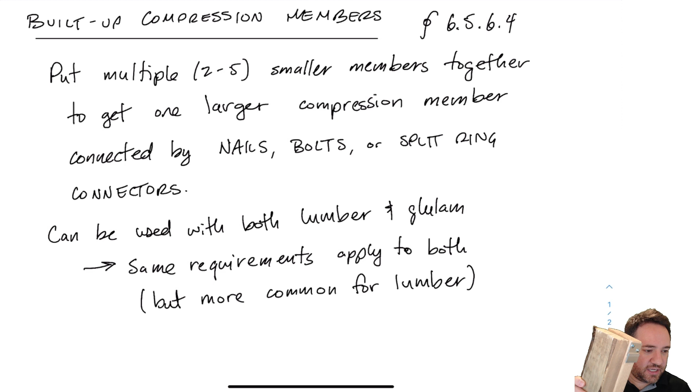So here, if I had two 2x4s, for example, and I put them together using nails, bolts, or split ring connectors, then I can consider this as being one solid column. If I do that, I'm going to get a big bonus to my buckling strength, compared to if I had to consider these as two separate columns buckling and just happening to be next to each other.

I do have to apply a reduction to the strength to account for the fact that we cannot connect these together perfectly using nails or bolts, but we still get a huge benefit to sticking them together, and we're going to see why in this video.

In the standard, it says that you can put up to 5 members together to make a built-up section. This applies to lumber and to glulam, and the same requirements apply to both. So everything in this video is for lumber and glulam, but it's much more common to see this kind of thing with lumber, because lumber members are smaller to start with, so it makes more sense to stick them together to make a bigger member.

Okay, so let's look at what one of these built-up columns might look like, and what are the requirements if I want to build one.

So here's a built-up column member. This one is very short, just so that it fits on the page. Generally, you would be talking about something longer because slenderness is probably your concern when you're doing a built-up column or built-up compression member. Here I have 3 different pieces of wood, probably lumber in this case, but could be glulam, all stuck together. So instead of 2, I have 3.

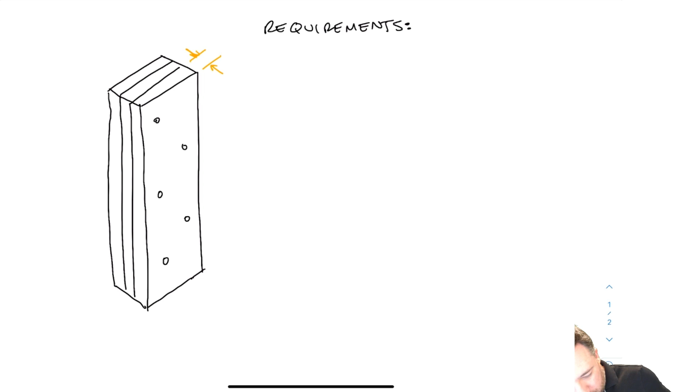As shown there, they are either nailed or bolted together, and you can see I've just indicated some nails here. This one, since it's 3, you could call that a 3-ply built-up column. But that just means that it has 3 members, and I can go up to 5.

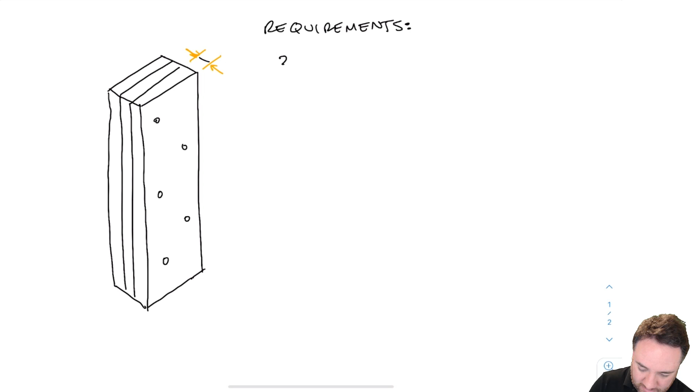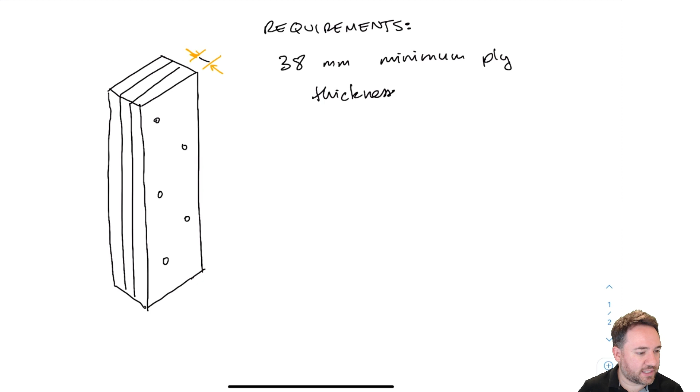So here are the requirements that we have to meet if we want to design a built-up column. First, there's a requirement on the thickness of the plies. Each individual ply of the built-up column has to be at least 38 millimeters thick. So that means a 2-by member is the minimum member that I can use. Anything bigger than that is fine - 2-by, 3-by, 4-by, all of those are fine. They do not all have to be the same thickness, but again, the minimum thickness is 38.

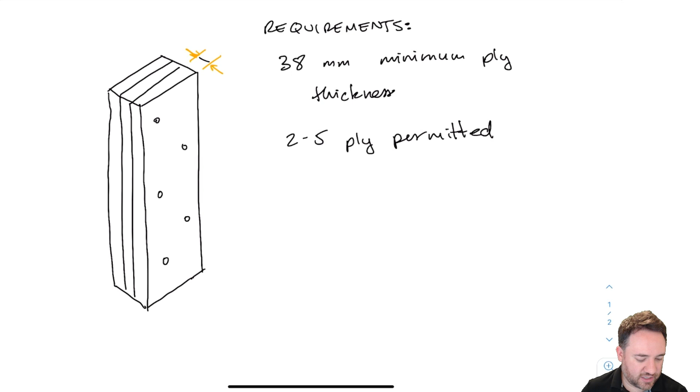We can have somewhere between 2 plies to 5 plies for a built-up column. The standard does not allow for more than 5 ply.

There are 3 different options given in the standard for built-up members, for how to connect them together. We can either use nails, bolts, or split ring connectors. We are going to discuss nails and bolts in this course, but split ring connectors are not included - you can look for yourself in the standard for what split ring connectors are and how to design them.

Also, we have to meet the minimum spacing requirements from the standard for nailed connections, which is obvious - the nailed connection has to be a legitimate nailed connection according to the clauses of the standard. We're not allowed to do glue explicitly for that, but you might recognize that if we did glue these members together properly, then effectively what we would have is a glulam column. So glulam is kind of like a special case of a built-up member, and we treat it separately.

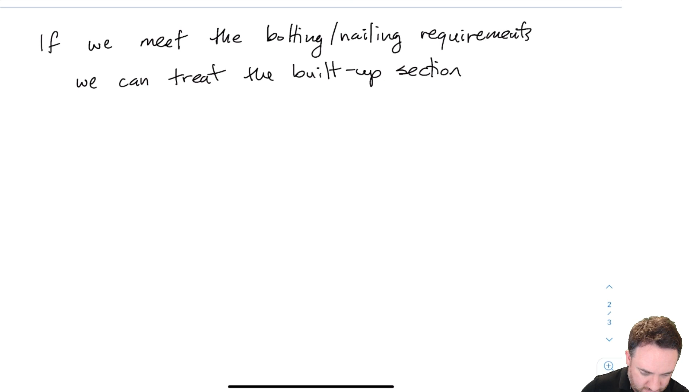So if we do meet those bolting and nailing requirements when we make our built-up section, there are some additional requirements we're going to talk about for exactly how many rows you need and how to space out the bolts and nails, which we'll talk about in a minute.

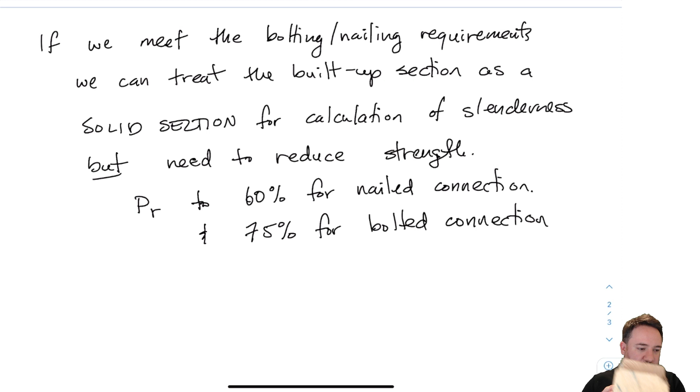But if I meet all of those requirements, then I can treat my built-up section as if it was an equivalent solid section. So if this is a 38 by 89 and a 38 by 89, and I put them together, if I follow the requirements of the standard and nail these together properly, then the size of this becomes a solid section that is now, instead of 38 by 89, it is 76 by 89. And that becomes my new section.

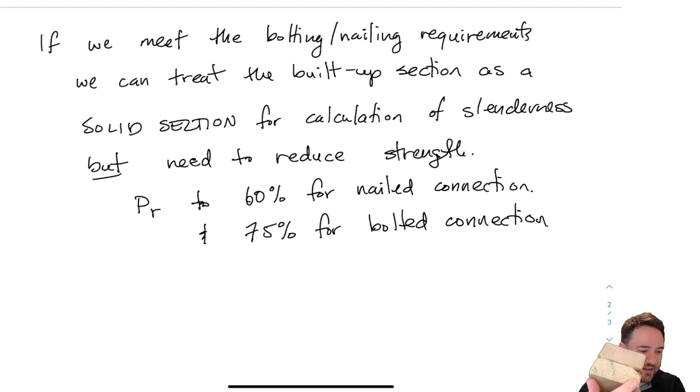Then I consider it as if that's a single piece of lumber, with the proviso that to account for the fact that they're nailed together, I have to reduce the overall strength of that section to 60% of the total for nailed connections and 75% of the total for bolted connections.

And you might say, well, I've made the section bigger, but now I have to reduce the strength. So what's the benefit? Turns out there's a really big benefit because of how the slenderness factor is calculated.

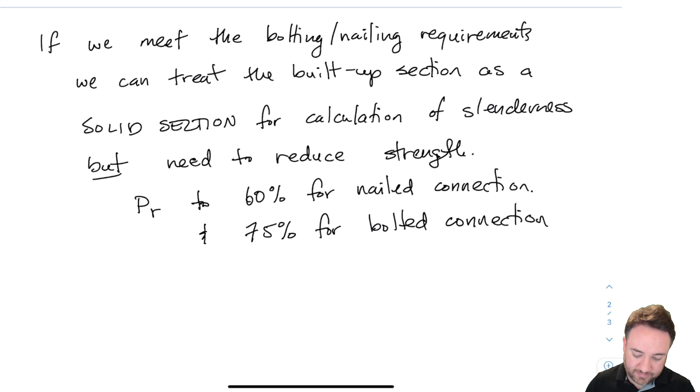So if I look at our equation for slenderness factor, and this equation applies both to lumber and to glulam, for regular compression parallel design, we have CC, which is our slenderness, and you can see that this thing is to the power of 3. So we cube our CC, right? CC is cubed in this equation.

And this is a reflection of the fact that our second moment of area, or commonly called moment of inertia, I, for a rectangular section is BH cubed over 12. So as I increase the height of the section, my moment of inertia goes up by a power of 3. So it makes a really big difference.

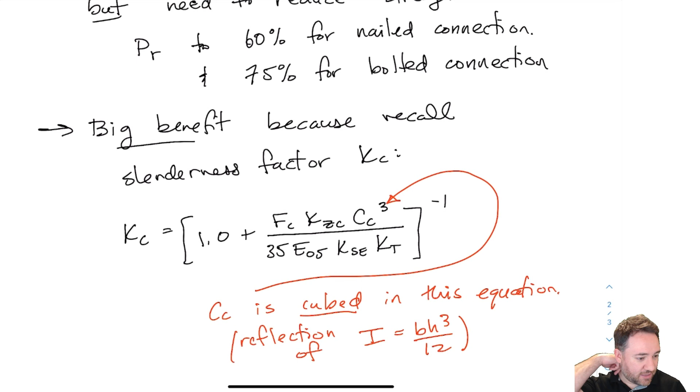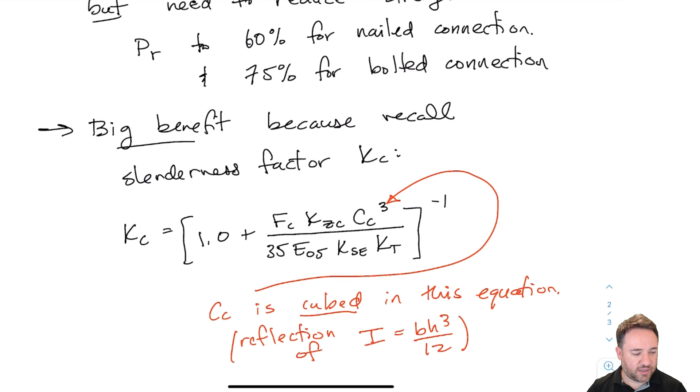So even if I'm reducing the strength by 40% for nailed connections, I'm increasing my buckling strength on the order of a power of 3, because my I is increasing by a power of 3. And here CC, all this stuff is a stand-in basically for I in this equation for KC.

So as I change my slenderness by a little bit, it has a much bigger effect on the strength. And so as I increase CC, like if I were to increase my slenderness, then the problem gets worse very fast. And since this is a -1 on this equation, it's an inverse, once I do the whole thing, as my CC increases, my KC decreases, and it decreases fast.

And so if I'm looking at it in the other direction, if I'm decreasing CC, then I get the same benefit, but in the other direction. So it very quickly decreases the effect of slenderness as I reduce my slenderness. So that is the big benefit of putting these together.

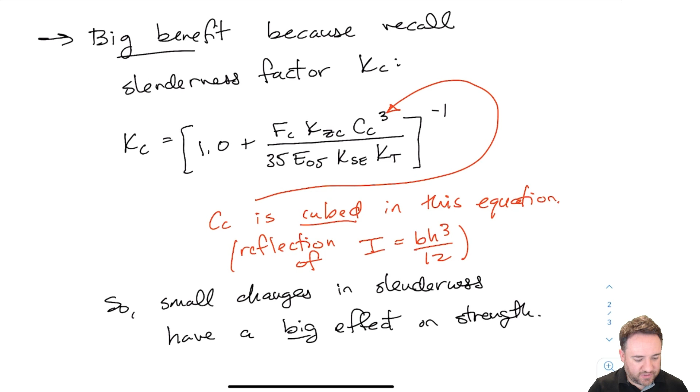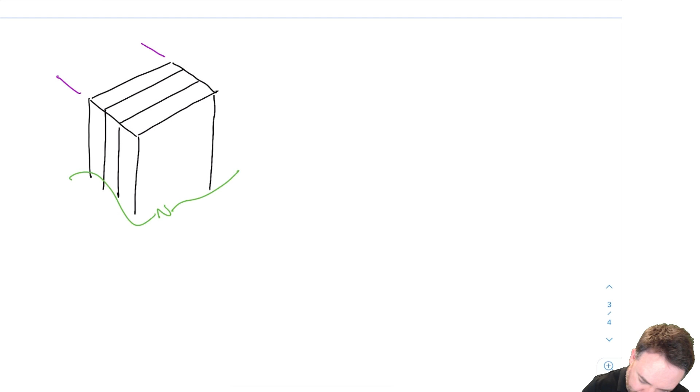So let's look at that a little bit more closely. I'm going to draw again what this built-up member looks like so that we have some basis for our comparison. So here's my 3-ply section again, just looking at the top of it so we can see how the plies are put together. So this one's 3-ply.

We have H, which is the strong axis direction of the individual pieces, and I've labeled B1 here as the thickness of one of the plies. This is not a variable that's from the standard, but just one that I'm defining based on an individual ply thickness so that we have something to talk about down below. And L, the big L, that's the total length of the built-up member, which we're not seeing the bottom of.

So let's compare what would happen if I consider these 3 members to be just individual members stacked up against each other. So as if I'm just calculating the strength of one, I calculate the strength of another, and I calculate the strength of another, and I take those total strengths and add them all up to get the total strength of the member.

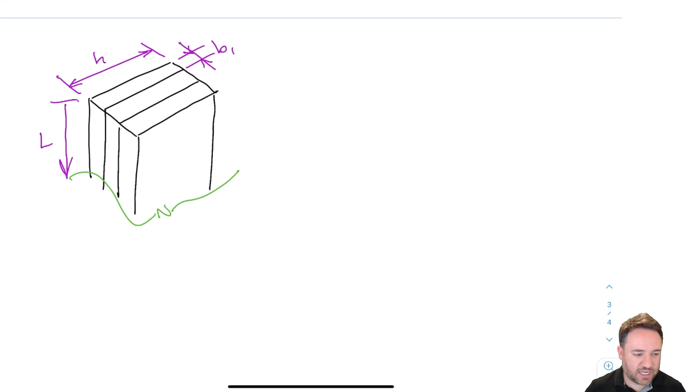That would be if I am not doing a built-up section. Compared to what is the strength of this if it is a built-up section, which means that I've connected them together well enough that I can consider the whole thing as one solid member. So let's see how the calculations differ between those two cases.

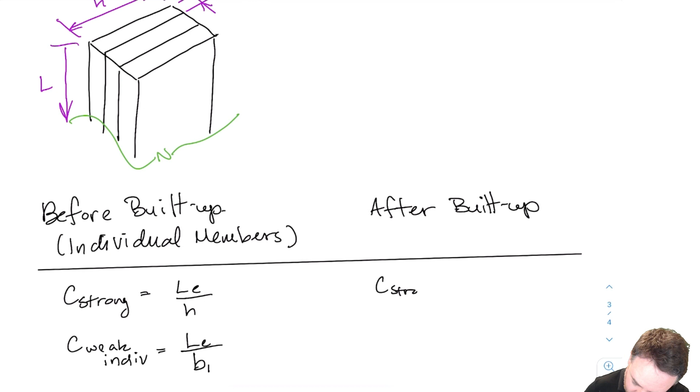Okay, so if I'm just comparing the calculation of the slenderness factors, CC strong, CC weak, in the strong and weak directions, if I do it individually or if I do it built up, let's see what I get.

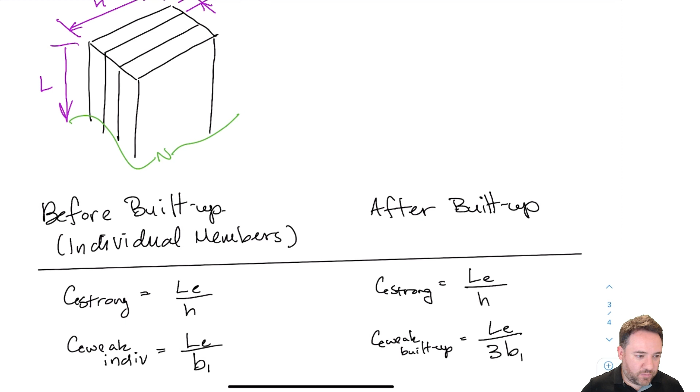So for C strong, that's the slenderness for buckling in the strong direction. I need to find first my effective length, which depends on the unrestrained length, the length between places where my section is restrained against buckling, and also K, which is the factor accounting for the boundary conditions of the member. And we divide that by H.

Which is the length of the cross section in the direction of buckling. So if I have strong axis buckling up here, we're talking about buckling in this direction, in the red direction, and H is my relevant parameter. L we've looked at how to calculate before, so that doesn't change for built-up sections.

Once I have a built-up section, my CC strong is still going to be the same. I have LE, and I still have H, because remember, the benefit of the built-up section is that I get to treat this as one solid section, and that solid section, if I have these two pieces again.

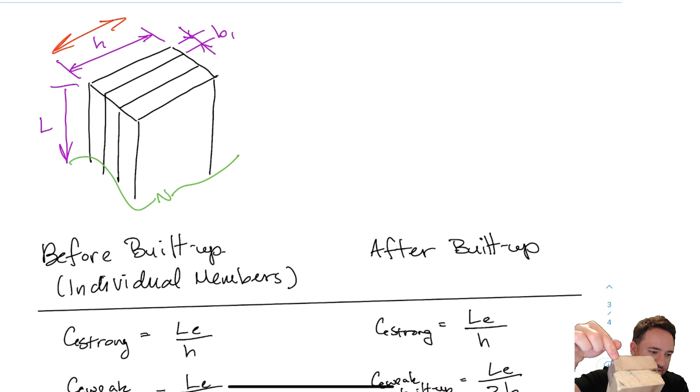When I had this individually, the strong axis direction was this, 89, the 4 of the 2x4. If I put them together, and now I'm considering this as one section, what's the strong axis direction length? It's still the same. It's still 89, so it hasn't changed.

Whereas for the weak axis direction, I still have my LE for weak axis buckling. So those LEs might not be the same. These can differ, based on boundary conditions and how it's restrained.

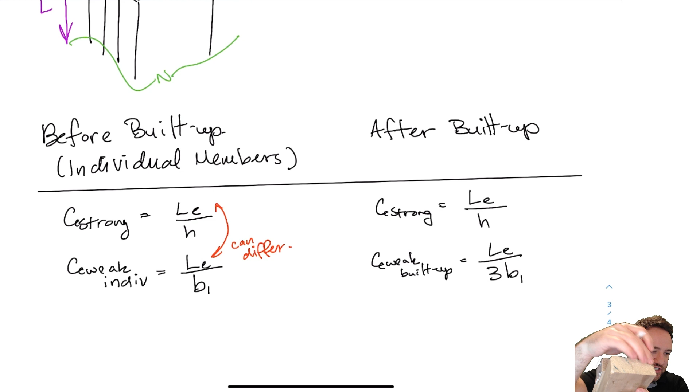But for how I calculate the slenderness, if I'm looking at these individually, obviously my slenderness for each of them is going to have this weak axis direction dimension, which is the 38. So I'm going to have 38 for this one and 38 for this one. So considering these two as separate, each one has a slenderness defined by its weak axis dimension of the cross section, this one 38.

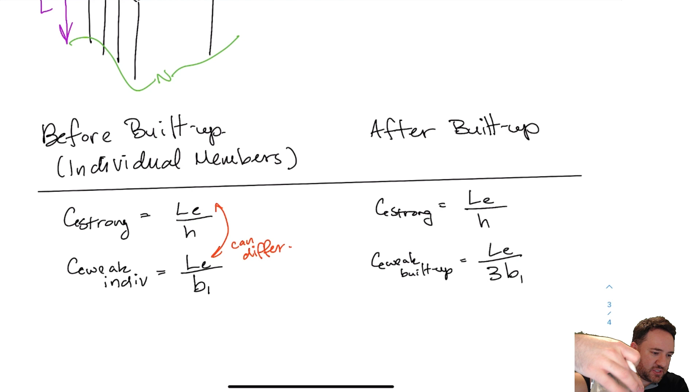But now when I put these together, I can consider the full section as one. So now I have 2 plies here, so this is going to be 2 times B, so it's going to be 76 instead of 38. And in the example we're doing on the sheet here, it's 3 times because there's 3 plies. This is 3 ply, so for more than 3 plies, this number would change.

So that's a big difference. I'm going to have 1/3 of the slenderness as I did before when I did the original built-up section. And remember, that doesn't account for 1/3 of the strength. So if I go from the right side to the left side, that doesn't mean I have just 1/3 of the strength. It means much more than that, because slenderness is raised to the power of 3, as you remember. So it's much more than 1/3 of the strength. It's not quite an 1/8, but it would be like a 27th.

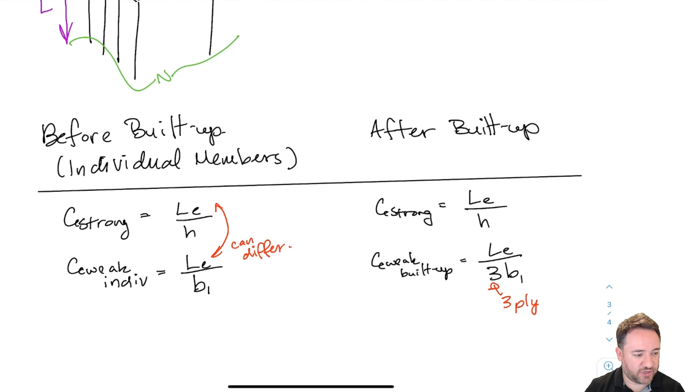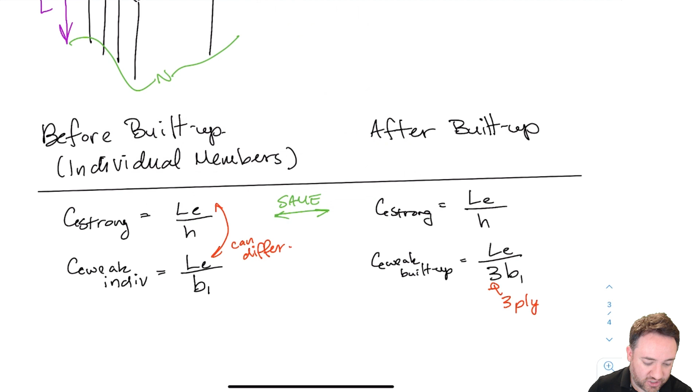It's not that bad, because that equation is not directly proportional to slenderness, the KC equation, but it does make a huge difference. So what you want to take away from this is that the weak axis changes a lot, but the strong axis, these ones are the same. So strong axis slenderness when we do a built-up section doesn't change, but the weak axis slenderness changes a lot. So let's continue and look at the next step, which usually is that we calculate KC for both directions.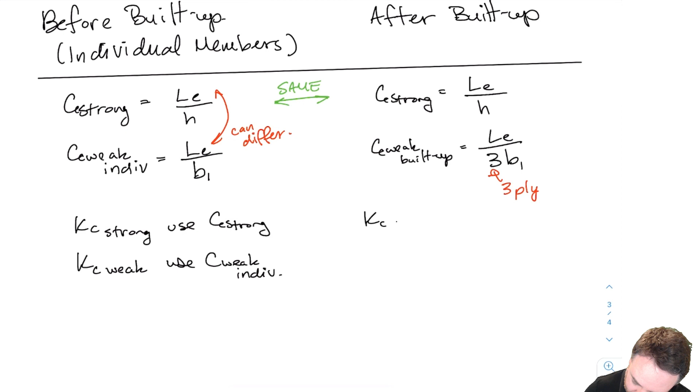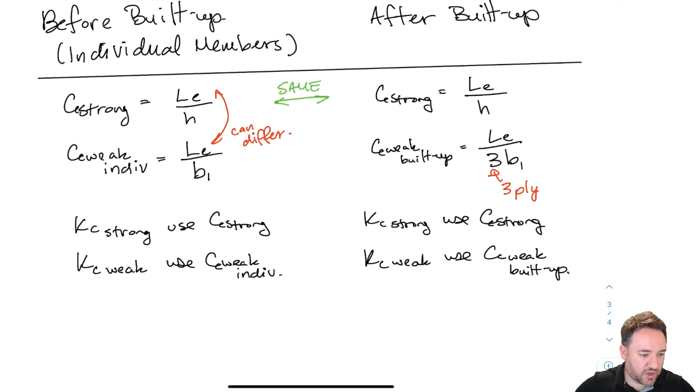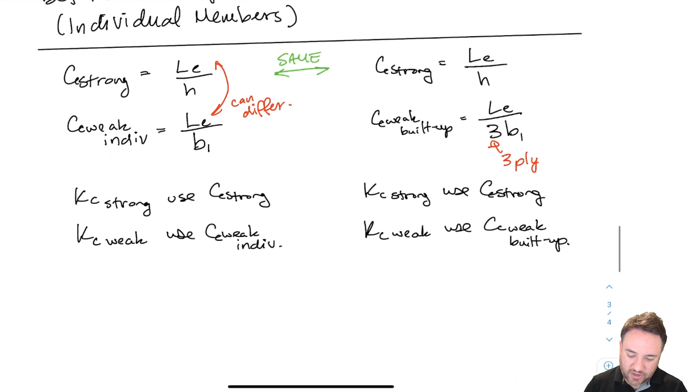So when I go to calculate KC, on the left side before I have it built up, I'm calculating KC for each individual member based on CC of the same on the left. So KC strong is going to be using CC strong in that equation. I'm talking about this equation right here, the KC equation. So I have to plug a CC in here, which is my slenderness. For KC strong, when I'm doing it individually, I'm going to use CC strong. For KC weak, I'm going to use CC weak based on the slenderness of the individual members, which is the one that's just above there on the left.

This one here. On the right side, KC strong, I'm going to use CC strong. That CC strong is the same, so it's the same strong axis slenderness as on the left and the same one as above. And KC weak, I'm going to use CC weak, but this time it's the built up version of that. Right? So that's going to be a much higher KC in the case on the right, because KC is the factor that accounts for slenderness. So higher KC factor means less slenderness effect, lower KC factor means more, because I have to reduce my strength by more.

Now I take that KC and I plug it into my equation and I do it like this.

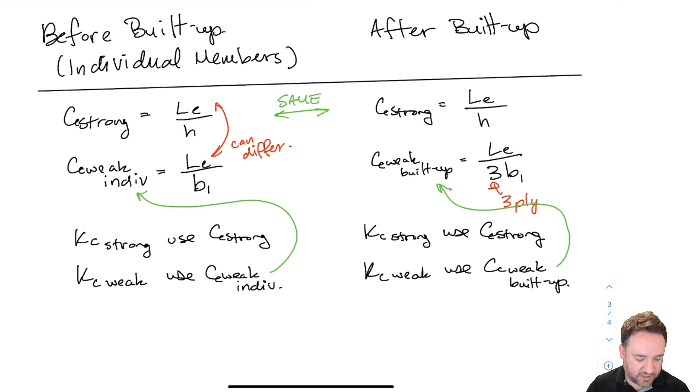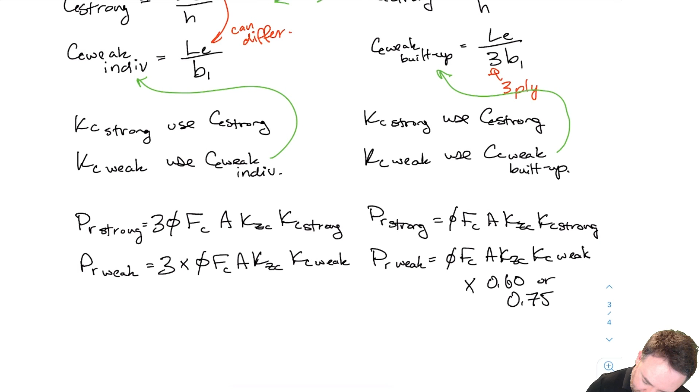Okay, so on the left, if I'm considering each of these to be individual, I'm going to do two calculations for lumber: one is PR strong and one is PR for weak axis buckling. The PR strong is exactly what we're used to. I have phi times FC times A. Oh, this should be 3 times as well. I'll get rid of this here too, it's the same. And this A here is of the individual member.

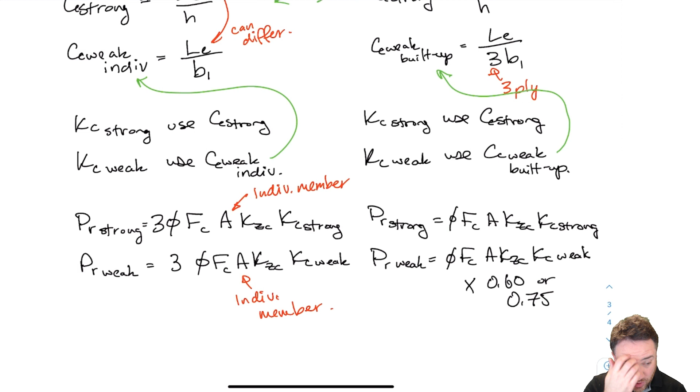Right, so each individual ply has an A, and that's the A I use in there. And then I'm going to multiply it by 3. Now here on PR weak, I'm also going to have 3 different members, and this is still also the individual member. And I'm going to multiply that by KC weak, which is going to be quite small in this case because it's the KC weak associated with just one member buckling, not the whole section buckling together.

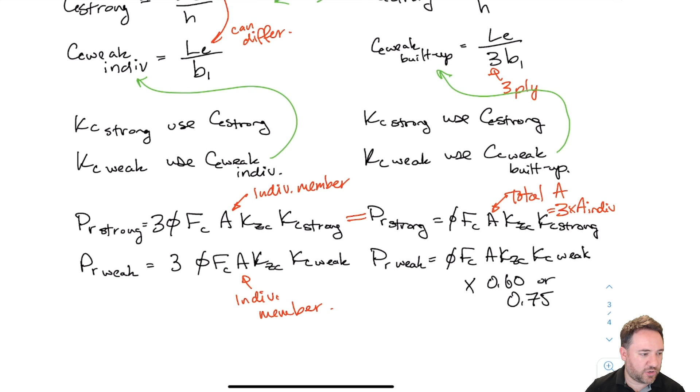Then on the right, once I consider that it's a built-up section, then I have for PR strong: phi FC A KZC KC strong. But now this A is the total A, which equals 3 times A individual. So these equations here are identical. The PR strong for if I'm doing it as 3 separate members, or the PR strong if I'm doing it as a built-up complete member altogether, I'm going to have the same strength. Either I multiply by 3 before I do the equation because I'm counting each individual member, or I'm multiplying the area by 3 because now I'm considering the built-up section altogether.

Now for PR weak, I have phi FC A KZC KC weak. Same thing, except my KC weak is different than the KC weak I used on the left. And this is the same A. I wonder if I can do that a bit better. So these are both the total A of the cross section. That would be, if I consider this built up section to be one solid member, it's this whole A here, which is 3 times the A of the individual section.

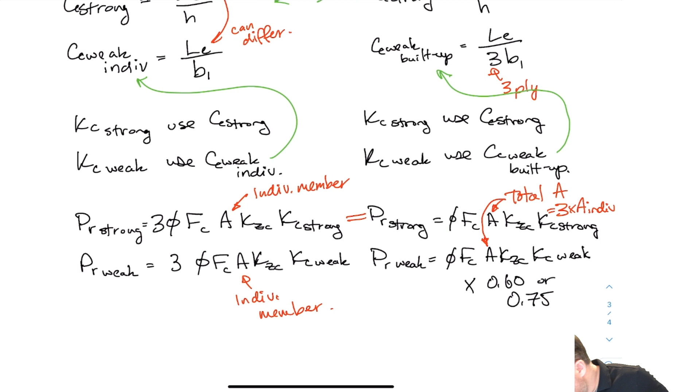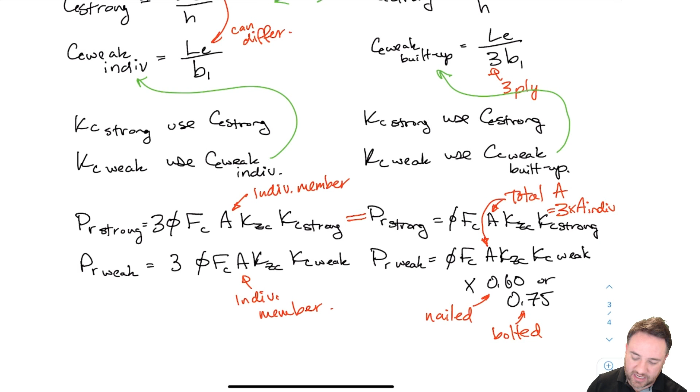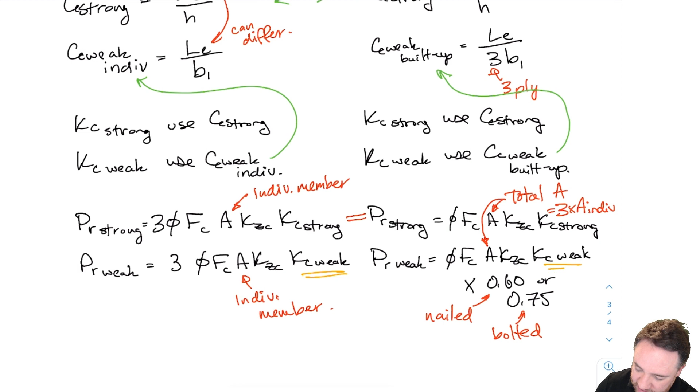And then I multiply that by 0.6 if I'm using a nailed connection to put my built-up sections together, or 0.75 if I'm using a bolted connection. So it looks like the difference between these two is that the one on the right should be less because I have a nailed or bolted modifier here for 0.6 or 0.75. But that's not the case because the KC weak between the two, this one here in orange and this one here, these are very different.

Because one is calculated using the individual slenderness, which would be very high slenderness, giving a very low KC. And the one on the right is calculated using a much lower slenderness, which is going to give a much higher strength. So these are very different.

Whereas the KC strongs were the same. Okay, so basically this whole built-up section doesn't affect the strong axis buckling strength at all, and that's what you should take out of this. And it does affect the weak axis buckling strength. Even though I have to reduce the strength to 60% or 75%, the change in KC more than makes up for that, generally in spades. So I'm going to get a big benefit by considering it as a built-up section.

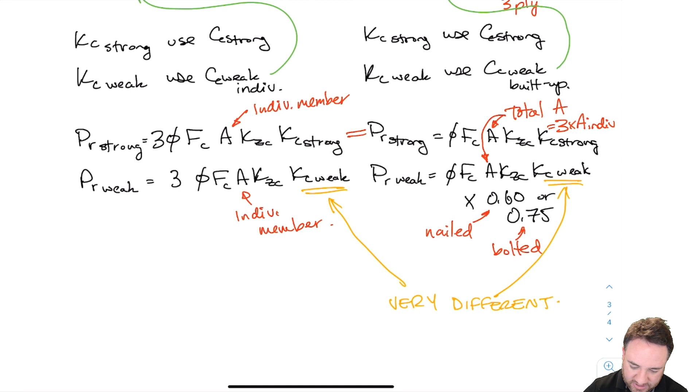Let me just summarize that part about the strong axis direction. The built-up section does not affect the strong axis buckling strength.

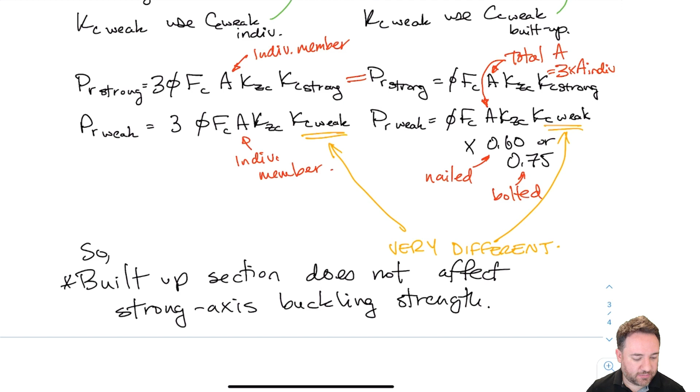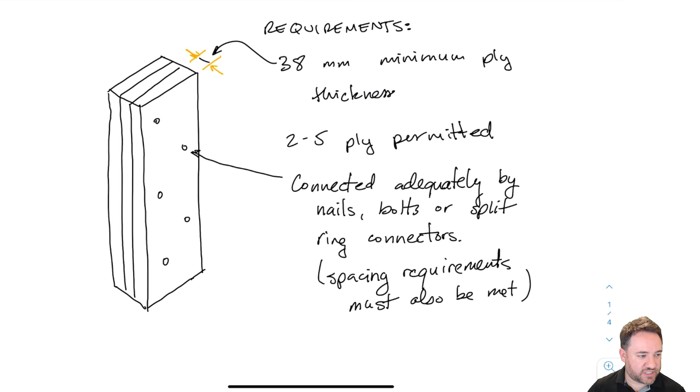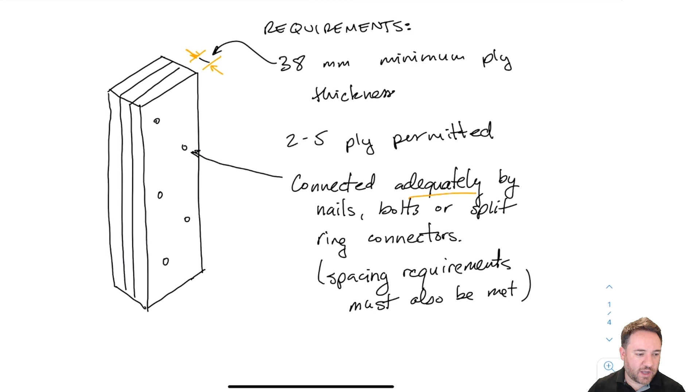Okay, so the very last thing we need to cover is what are the requirements for built-up sections when I nail them or bolt them. So I have the requirements already from above: I have to have a 38 millimeter minimum ply thickness, I can do 2 to 5 plies on my built-up section, and I have to make sure my section is connected adequately by nails, bolts, or split ring connectors. So we have to say, okay, how do I define that it's connected adequately? Well, the standard provides explicit direction for what constitutes adequate connection between the plies, and I will call out the clauses as well.

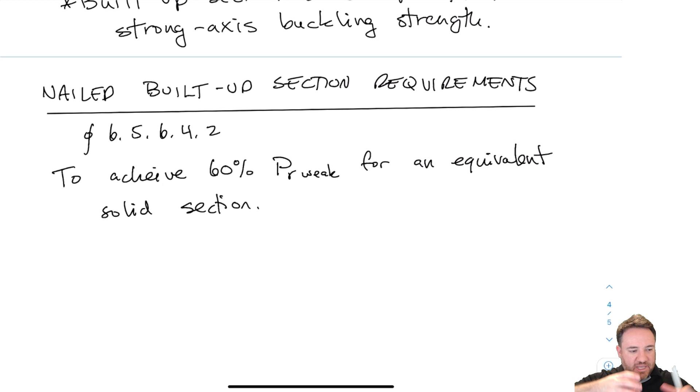So we're going to start with the nailed built-up section requirements. If I follow these requirements, it allows me to achieve a maximum 60% of PR weak for an equivalent solid section, considering that my built-up section is actually just one big piece of wood that doesn't have plies. Okay, so there are 3 requirements here.

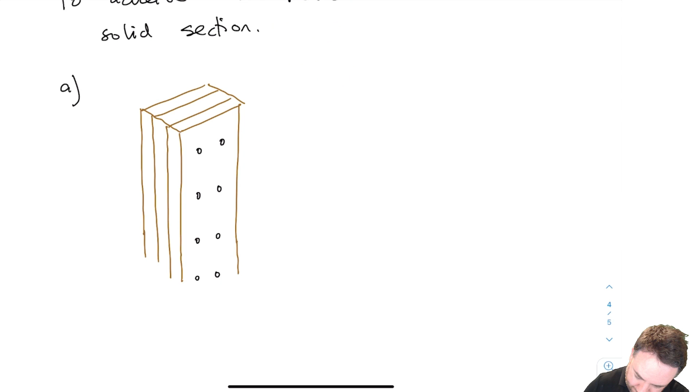So the first requirement has to do with how these nails are spaced. If I'm nailing into the section, I'm going to have spacing between those nails, and those spacings are defined by the thickness of the thinnest ply, so that's why I'm saying B min. Imagine I have 3 plies here, they could be all different sizes. Whichever one is the thinnest, that defines my spacing requirement.

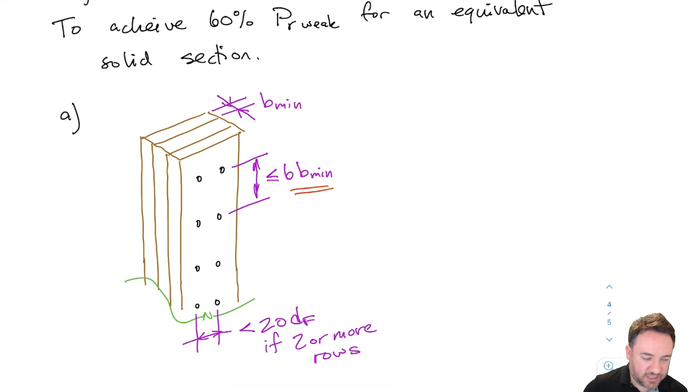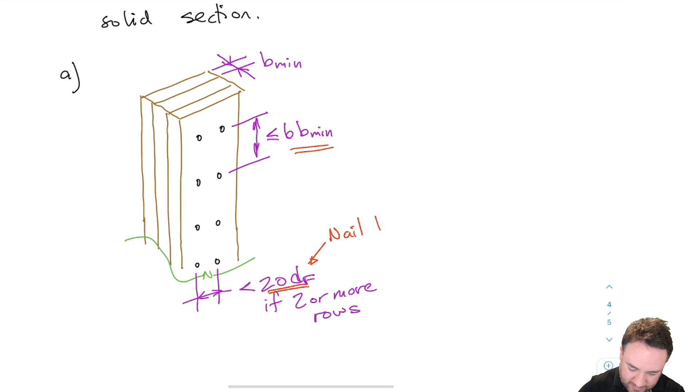So you can see that spacing along the length of the member has to be less than or equal to 6 times that thickness, and spacing between rows, if I need more than one row of fasteners, is 20 times DF. DF is the nail diameter. We're going to see this parameter a lot when we start talking about nailed connections in detail. B min, again, is the thickness of the thinnest ply.

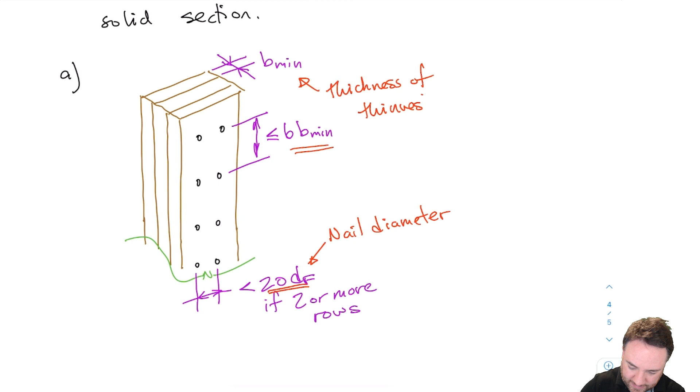Okay, so the second requirement now. Requirement B actually has 2 requirements, and they have to do with how the nails are actually laid out and go into the members.

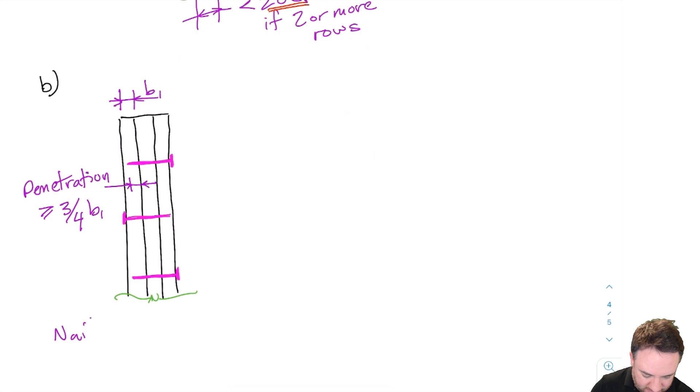So one requirement is that the nails have to alternate in direction. If I have one nail that goes in one side of the member, the next nail down has to go in the other way, and then the next nail below that has to go in the other way, and so on, so they have to alternate directions.

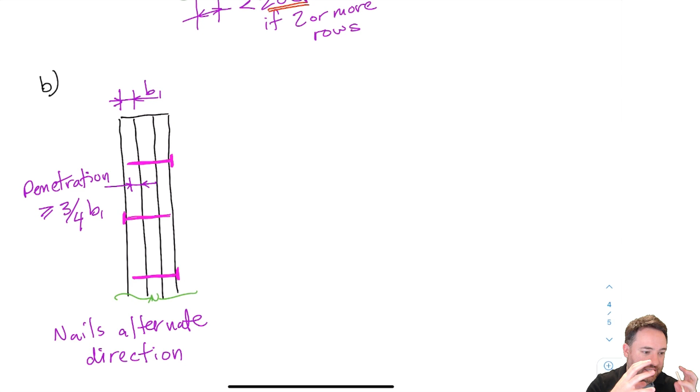The second requirement is on the length of the nails. I have to choose nails that are long enough so that they will penetrate at least 3/4 of the way through the last ply at the tip. So the first nail at the top goes all the way through the first one, all the way through the second one, and into the third one, and it has to go at least 3/4 of the way into the third one. It could be more than that - you could poke it through and bend it up on the other side, although that won't look very pretty, but that's the requirement. So I have to make sure my nails are long enough so that I'm actually connecting these plies together properly. Now the third requirement.

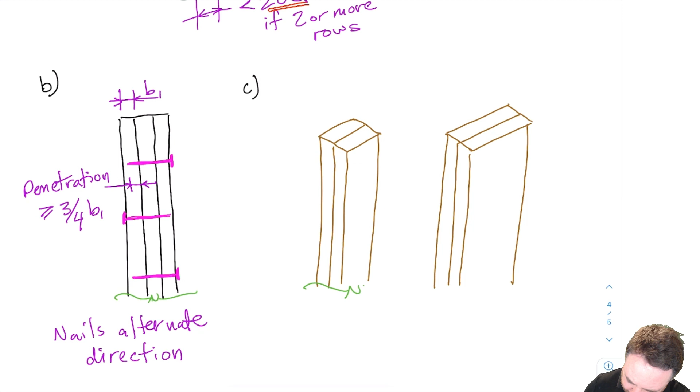The third requirement has to do with whether you need 1 row of nails or 2 rows of nails. Wow, that is a pretty crooked piece of wood that I drew there. Anyway, I hope that that's charming.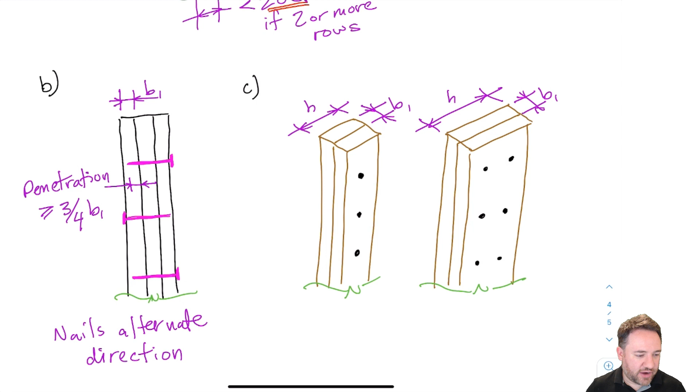On the left side, I'm showing 2 pieces of wood that are not very wide compared to how thick they are. On the right side, I'm showing individual plies which are a bit wider, with a higher aspect ratio. The border line for that is if H over B1, where B1 is 1 ply thickness...

...is less than 3. So if the length of this piece is less than 3 times the thickness, which it is for a 2x4, right? Because this is on the order of twice this... a little bit, well, actually it's about 3 times, because this is 1.5 and this is 3.

So if I have a 2x4 or chunkier than a 2x4, then I'm allowed to have only 1 row. 1 row is okay. If H over B1 is greater than 3, which looks like what I've shown on the left - sorry, left side is less than or equal to 3 - if it's greater than 3, then we need at least 2 rows of nails.

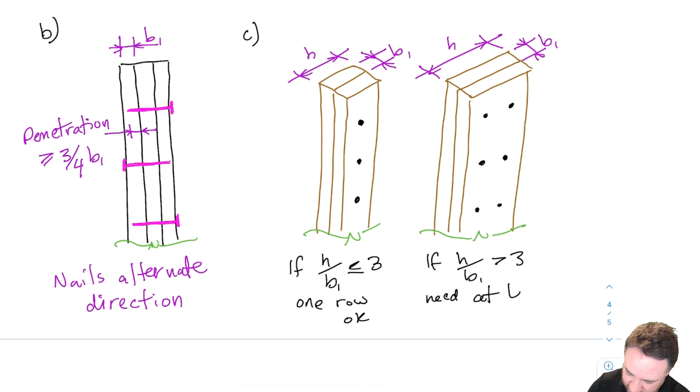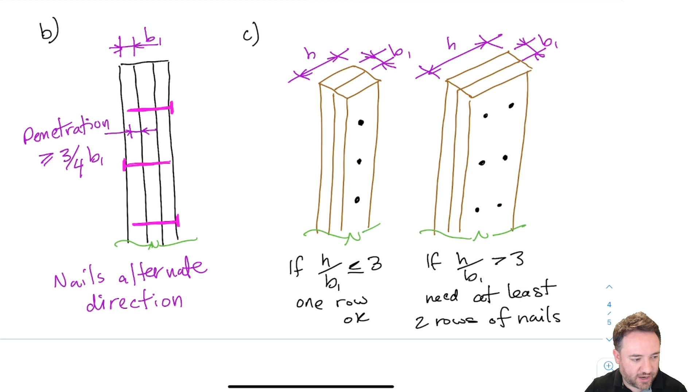And how those rows are spaced from each other was a requirement that we discussed already previously, which was up here, right? So that's how the row spacing works.

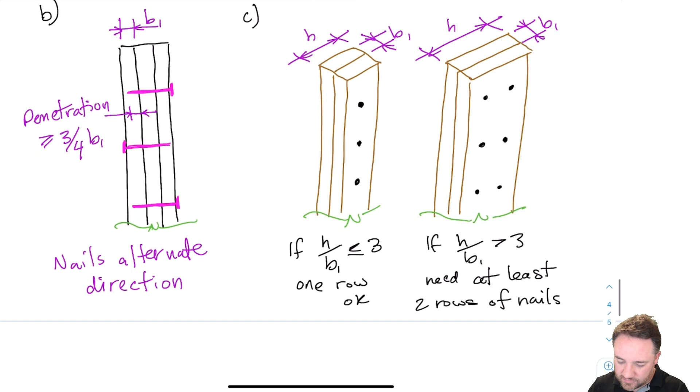So as long as you satisfy those 3 requirements - the requirement for nail spacing, the requirement for penetration of the nails and alternating direction, and the requirement for whether you need 1 or 2 or more rows of nails - if you satisfy all 3 of those, then you have considered an adequately connected nailed built-up section, and you can calculate the strength of that section for the weak axis buckling using 60% of the strength that you would get if you considered it to be a solid full section.

You know, as if it was just one big piece. Okay, so let's look at the requirements now finally for bolted built-up sections.

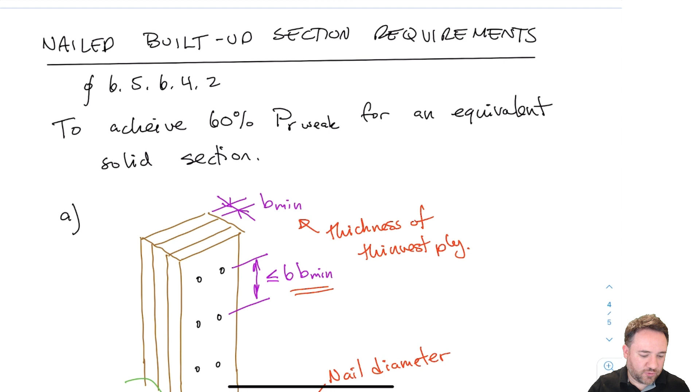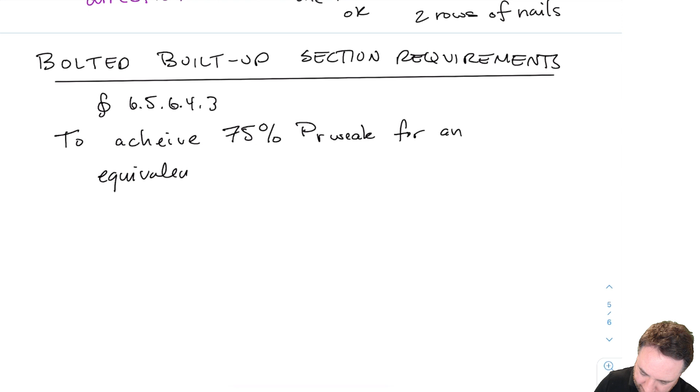If I can satisfy these bolted built-up section requirements - the connection requirements for making a built-up section out of bolts - I will be permitted to consider the section strength as being 75% of the weak axis buckling strength for a solid section the same size as the built-up section.

The first requirement, which is just in the body of the clause, is that you need to use 1/4 inch diameter bolts at least when you put these together, so you can't use a smaller bolt than that. And then we have basically 2 requirements for bolted sections. So here is the first one.

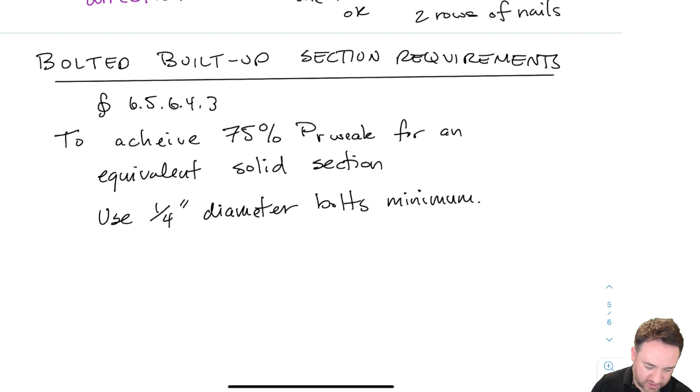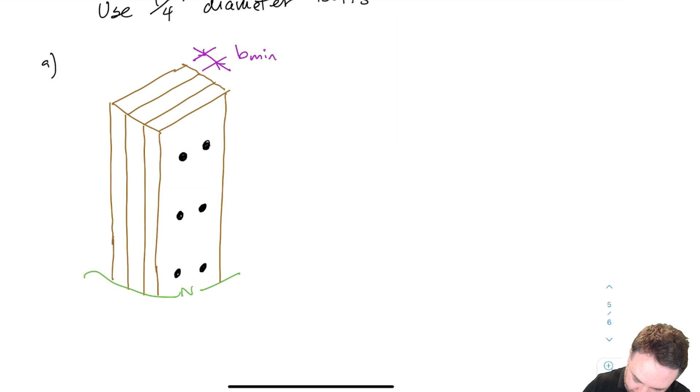This first requirement is a spacing requirement, very similar to the spacing requirement that was there for nails. So basically, we again look at the thickness of the thinnest ply, and the bolt spacing along the length of the member needs to be less than 6 times the thickness of the thinnest ply. That's the same requirement as there was for nails.

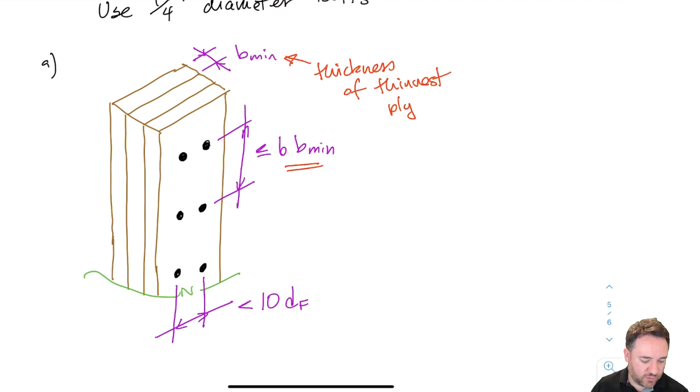For the spacing between rows of bolts, it's a little bit different. For nails, it was 20 df, if you recall. Yeah, it was 20 df. And for bolts, it's actually 10 df, where df here is now the bolt diameter instead of the nail diameter.

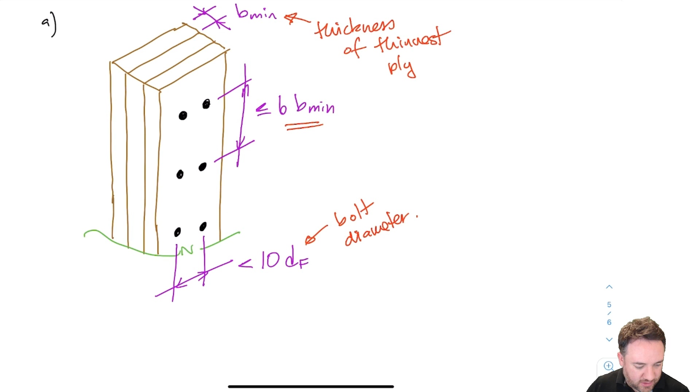Okay, so that one's pretty self-explanatory. And the second requirement...

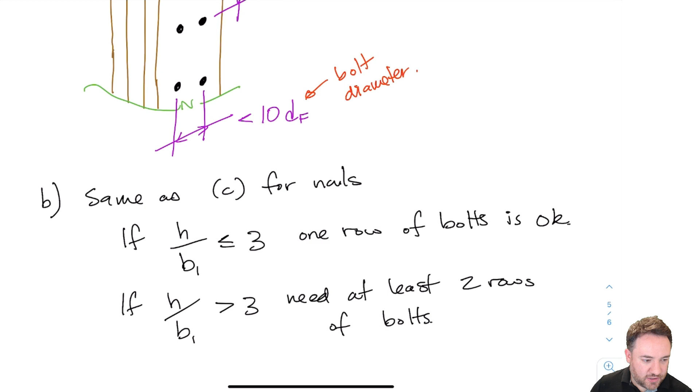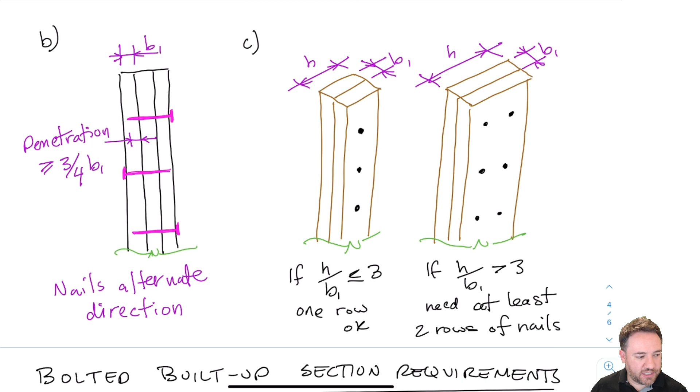The second requirement is the same as the third requirement for nails, which is this one up here on the right. So if my h over b is less than 3, then 1 row of bolts is okay. And if h over b is greater than 3, then I'm going to need at least 2 rows of bolts.

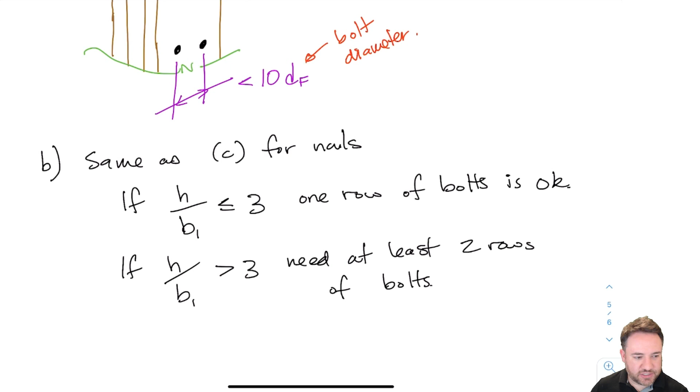And that's all the requirements that there are for bolted built-up sections. So as long as I follow those two requirements - the spacing requirement and the number of rows requirement - then I will be able to achieve 75% of my solid weak axis buckling strength for an equivalent solid section.

The reason, of course, we don't have the third requirement, or the second requirement that was for nails, is because that one was for penetration and for alternating directions, which obviously don't apply to bolts, since bolts go all the way through all of the members.

So that should be all you need to know to design built-up sections with nails or bolts, and we will follow this up with an example problem.